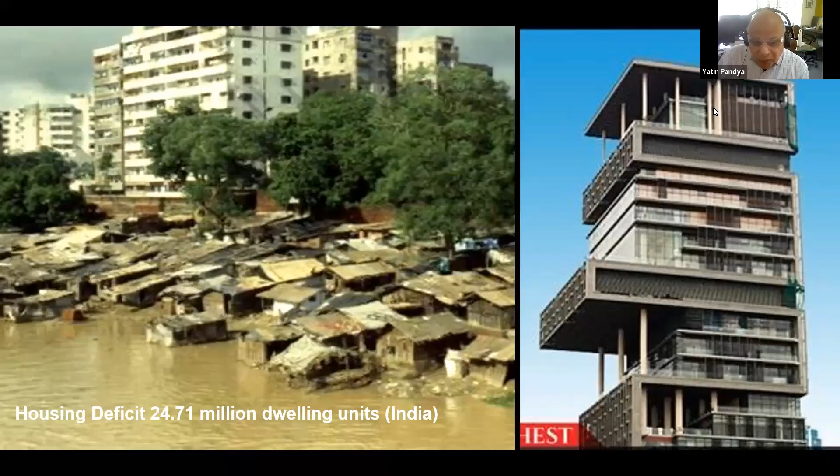So with all that, what are the kind of challenges and realities within which we need to consider the design? This is just an acknowledgement of the complexity and the number of challenges we have. But as a student, as a young mind, it is not to start with disappointment and frustration. On the contrary, it is with a challenge accepted to say, can there be a win-win solution?

Like Gandhi gave us once. Gandhi was not only about freedom from Britain. He said that you would also be a slave if you are not self-reliant; then the macho husband would also bully you, and a slumlord or a village lord would also exploit you. So with one or two idioms, something like the charkha, he ensured gender empowerment, rural empowerment, economic equity, and so on, and with sanitation and many things. So he went to the seed of things.

He tried to change the DNA of a system, so his contribution has been multifold, from safe sanitation to affordable education to economic empowerment to rural upliftment to social integration to gender equity. He was after sanitation because we call people untouchable. The root cause of untouchability is that those who clean after you are the ones you call untouchable, when actually you have to clean after yourselves. So if we find a system by which you don't need the scavengers, then that discrimination would not happen.

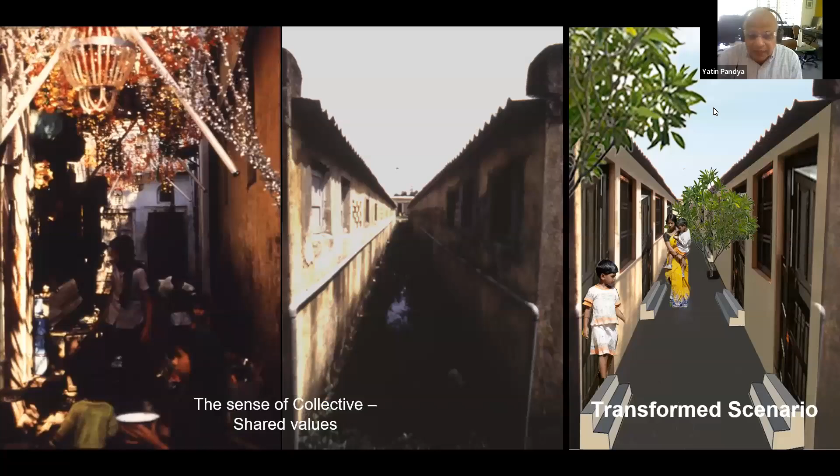So that's what we keep trying to keep. Don't worry about who we are today. Don't fool yourself. We have changed so much just because of the smartphone. But as humans, we are the same. And what are those dimensions at the human plane that we can try and include in our design equation, so that we can create a quality of environment where we could make a difference through design?

As against that, the picture in the middle is a newly planned settlement, and there is a gap left between the two back-to-back houses for services to run. So it is actually meant to be an improved solution, an environmental street, so to say. But as you see the design flaw, there is a kind of window at the back of that house, which is a passive interface, where arguably there would be a kitchen, and everybody throws their muck out of that window into that back alley, which is just a dead space.

And as a result, what should have been the element to improve the quality of environment has actually become responsible for degenerating that environment. Now, if you simply, in terms of design awareness, change that window into a door, arguably you would have an image like on the extreme right, where it would be positive space. Nobody would make complaints about what's happening at the back, because both neighbors at the back and side would have mutually divided the space as their own, and they would maintain it without asking or waiting for a municipal employee to come and do that.

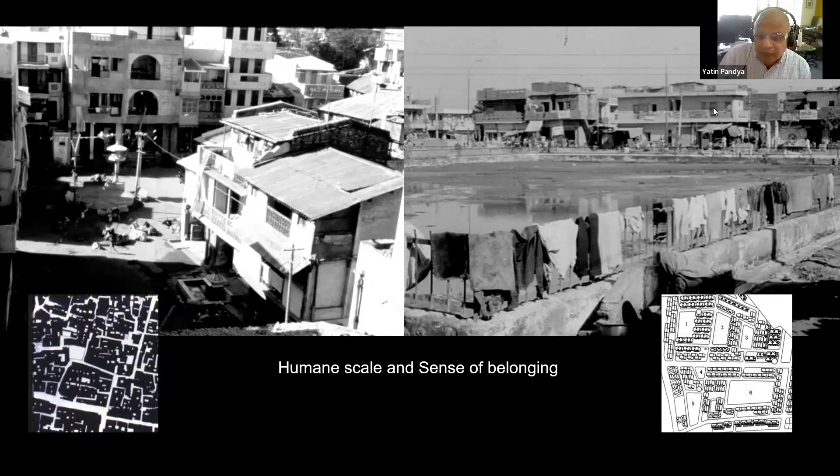So these are the kinds of things where, as a designer, if we are aware about the context, aware about the kind of grain of the culture and so on and so forth, we might do better. Like here, these are apparently contrasting slides, but they tell very aptly that these decisions are not about economic availability or status. It's more in the mindset rather than economics.

For example, on the right, one of the most expensive real estate in the world is the Ballard Estate in Mumbai. And what you see below are the most beautiful colonial structures, occupied by one of the wealthiest corporate houses of the country, now of the world. So if you see them from the street side, they're very beautiful picture postcard images.

But if you just go to the inner side, the rear side, so to say, you can see the context, that there has been a pipeline over a window, which means that you have nothing to do with that side. And that attitude has relegated, in Mumbai, where every square inch is forbiddingly expensive, these kinds of spaces to be abandoned, unused, encroached, and therefore a dump yard. And if I may add, a junkies' place post business hours.

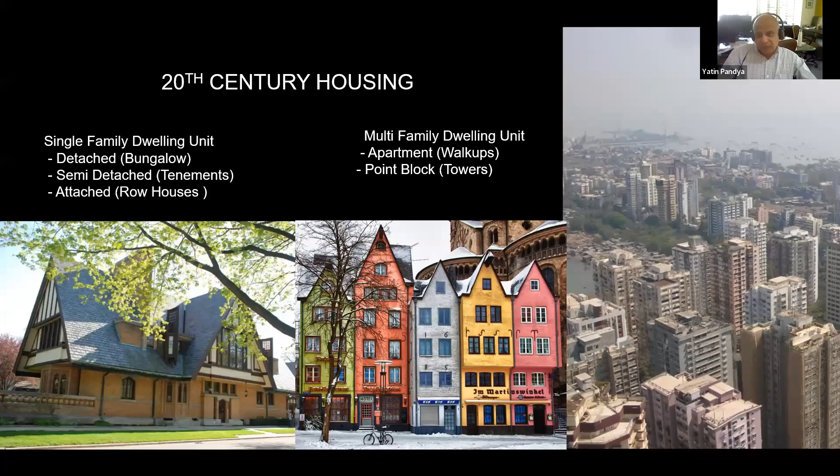Then there is something called mid-rise, something like 6 to 8 stories, a mid-rise development, and 8, 10-story and onward is a high-rise in Indian definition. So it might still change; overseas you have 100-story and whatnot, which so far we are not. We are probably talking till 40 stories right now, which are point block towers. So those are the kind of typologies we have.

What are the inherent qualities and limitations? So when we talk of bungalow, it is conducive to transition from suburban to urban. There's flexibility of orientation. There's a growth potential. It supports the family unit in terms of play area for children. Elderly can come out and flex their muscles and be free, and it's a low density.

As I say, it came from that Bangla, and therefore it was in response to hot, humid climate with transparency to breeze, multi-tiered roof so that air can flow through. It could shelter from sun and rain, therefore veranda, and it was extroverted. So the life happened because of the comfort condition in veranda. Now, when it is in veranda, then you need privacy. Therefore, there was a compound with a setback and a distance.

Try and build a bungalow without a setback. You will feel naked there. Okay. So these are the consequences, and these are the kind of types that there are. So we see that in Goa, we see that in many places. It's a colonial hangover like this. So the life was in veranda, and even a staggered louvered door, so that even the things inside.

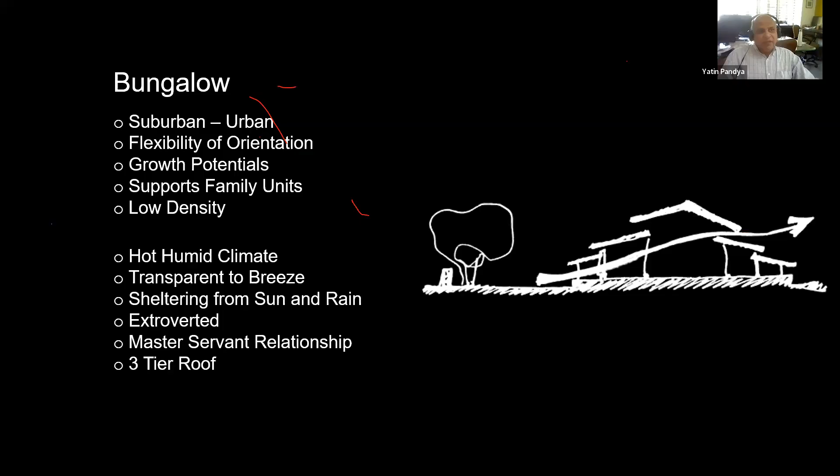Now, the comparison, the point to keep in mind is that central most space. Let me go back here. In the section, the most central space is closed, and it's a big hall for banquet and party, which means that the most inner space was the most public space. A total reversal of courtyard houses, where the courtyard was the most private space. And if you conquer the courtyard, you have invaded the whole house in terms of its privacy, in terms of its life, and so on and so forth.

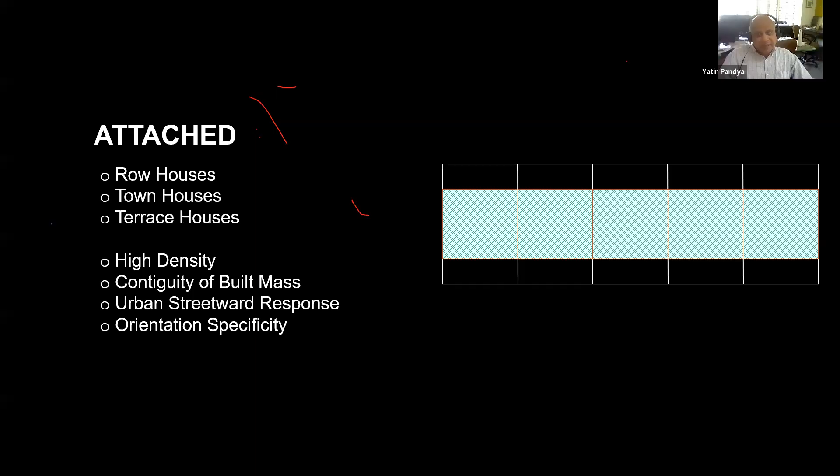Semi-detached house, where at least on one side you could connect. So it's the same as a bungalow, but you are able to squeeze it a little more for the land needs. Share it from two sides, and now certain characteristics change. It's still a single dwelling, but there is an orientation to the street. So this starts getting streetward. It's a little more high density, and at least to the walk-up, it can compete quite better.

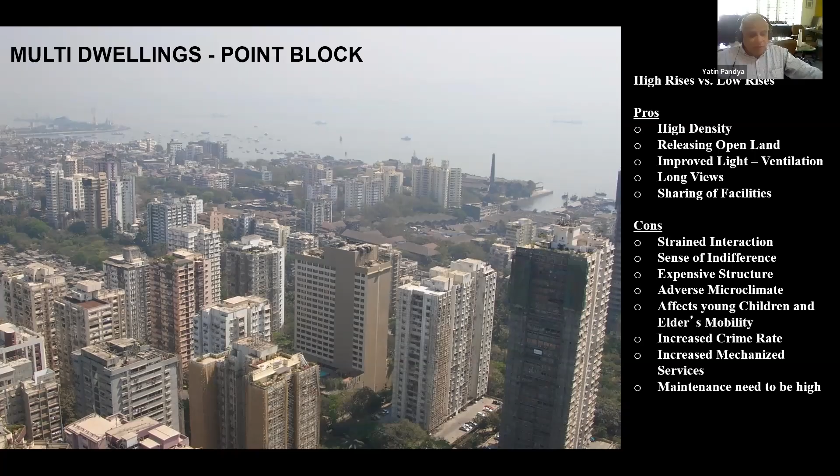But like in Mumbai, to have these slum people live in this, where most of their life is outdoors, their houses are small, so they want to live outdoors, their economic activities are outdoors, their relation with the street is what gives them economic sustainability. And their level of affordability to maintain a number of elevators, etc., is not there. So for them, is this the right typology? So you have to think for whom it is right.

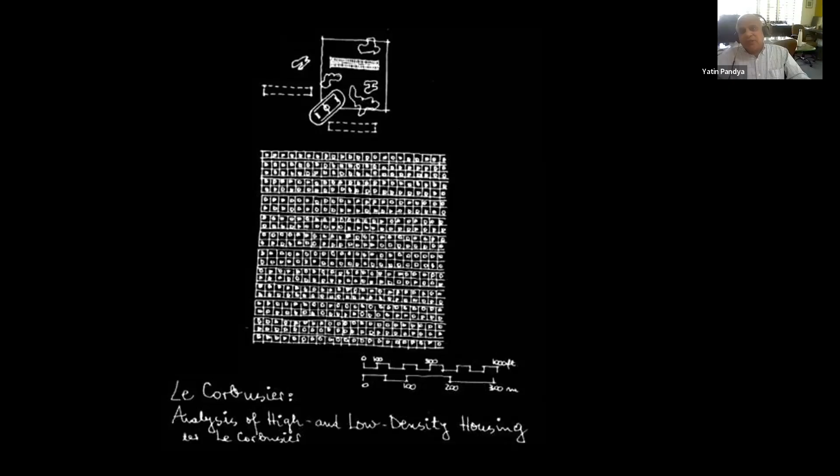So this was the kind of sprawl of a neighborhood, which Corbusier said can all be put together with the advent of concrete and later the elevator, after industrialization in the beginning of the 20th century. So he said that we can put it in one kind of a block, and that's how it came about. But look at what threshold it starts making sense, and till that threshold, there is another alternative which is far better. For example, this is only a simulation for FSI 1.

And let us understand, India does not mean Mumbai, Gurgaon, and certain parts of Chennai or Calcutta. How much of Calcutta even today is low rise? How much of Chennai is low rise? How much of Delhi? Even in Mumbai, go to the original parts of Bandra, Worli, Bhuleshwar, and all that, and it's still low to mid rise. So don't get too caught up by only the soaring skylines.

So this is why I'm saying that still in many places 1.2 FSI prevails. And so if you were to think that, okay, just look at this, both cubes, which means the volume is same, the quantity is same, the cost is same. But if you think of this as a truffle cake, in one I cut slices vertically, then everybody gets the crust and everybody gets the cream or the cherry.

Same cake. That is a row house. That is the traditional house of any part of the old city. The one on the right is an apartment, where it's the same cake, but I'm slicing horizontally. So somebody gets the crust, somebody the sponge, and somebody the cherry or cream on top. So it's how you cut it.

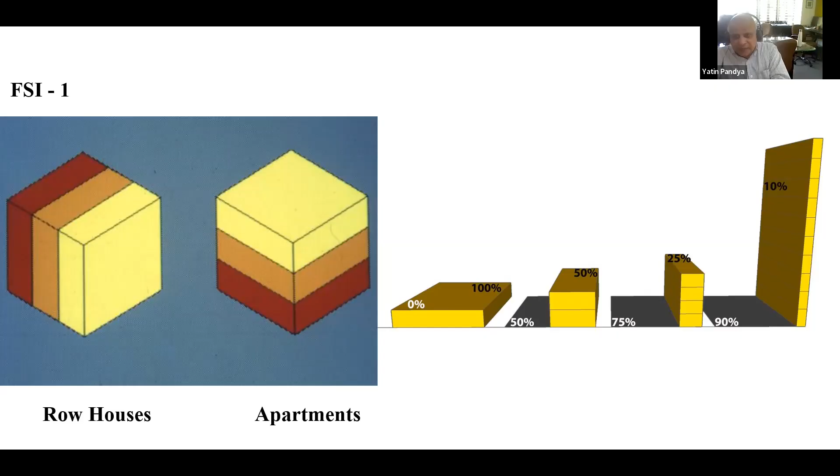Why only one FSI? Here is a simulation that says you can see 2.2, 2.5 even in a walk-up with everybody getting a terrace. Like ground floor, you can cover 60%, so you have 40% open space, 60, 40, 50, 40, 30, a standard progression, and you get 2.

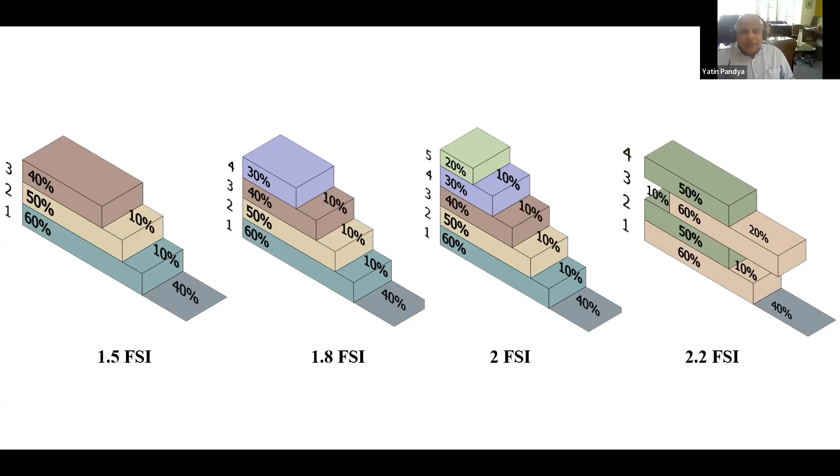But don't forget our upper floors tend to project out so that when the sun is overhead, you could cast the whole facade in shadow. So when you do all that, even 2.2, 2.4 FSI is very doable without any compromise on any aspect in a 4 to 5-story building. So this is just to remember that till this, it is your choice to go high rise, but not a compulsion.

Again, about the type vis-a-vis the default open space. In the left-hand side pair, suppose it was a 70 feet by 70 feet plot and you left a 10 feet margin. As you can see in this reticulation diagram, 7 by 7, so 70 by 70, 4,900 square feet, of which just a 10 feet margin leaves you with 50 by 50, which means 2,500. So from 49 squares you're reduced to 25 squares, which is just about half. So 50% of land has gone as open space, simply fizzled out into that 10-foot margin.

Okay, so that is the kind of issue. And although 50% of your ground coverage has been consumed, that 10-foot margin is not good for parking a car, not good to plant a big tree. Kids can't play there. You can't have a collective gathering. Just reverse it, like this perimeter block.

You have the same density, same FSI, same built-up, and same amount of open space, but now 50 by 50 is a kind of cluster courtyard. You get 50 feet by 50 feet, which means you can at least have 4 to 6 trees. You can have about 200 people gathering there. Children can play there, and you can have something like 12 cars parked there. Okay, so that is the kind of difference we can create just by reversing this footprint.

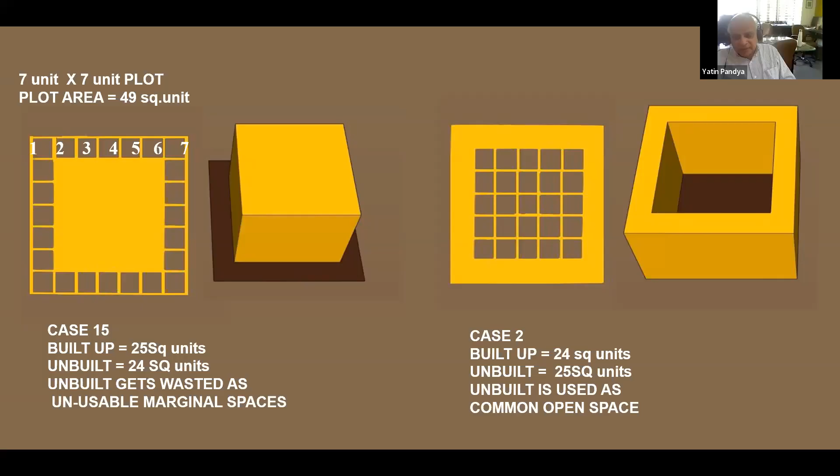So we have to understand not only the quality, but also the way we lose out quantitatively by choosing a different type. And this is a simulation for about 1.6, 1.8 FSI. You have to just trust that both are the same. But typically, what we see in urban areas is what is there on the right, and we think there's no choice other than that. And we are happy seeing these isolated needles as an urban form, whereas the same is doable on the left-hand side, where you can see it creates intermediate open spaces.

There's a sense of neighborhood. There are terraces, and there is a street formation, where on the ground floor you would have shops, on the upper floor you might have some offices, and then the top floor could be an institute, and likewise in Jaipur. So it's one of the nicest streets. So this is what we need to be aware of.

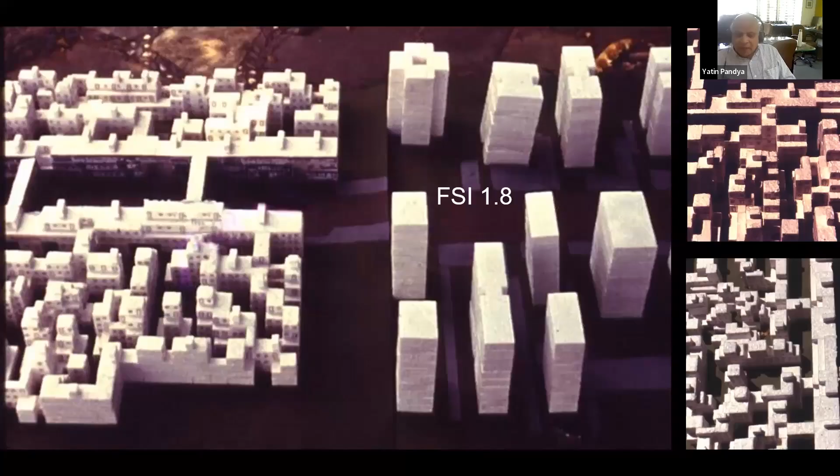And now, if you choose to go high rise or beyond the threshold, if you have to go high rise, then what are the design obligations of that? Okay. For example, this is by architect Yashvant Mistry, who just passed away, from Vadodara. This was his design in Ahmedabad called Naimesh Park, and it literally wants to say bungalow in the sky.

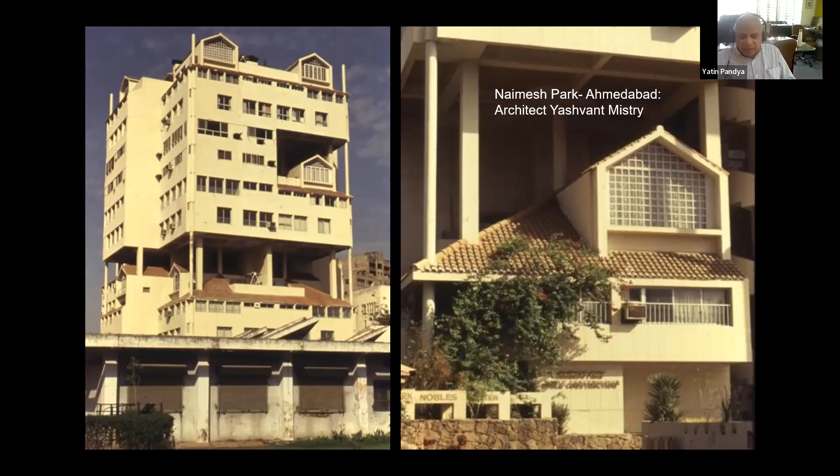Now, its aesthetic may be arguable, you might say it's faking, but at least the notion, at least the direction, at least the kind of idea holds that this tries to give outdoor space, this tries to give identity, this tries to give a different kind of image, etc. Well, that may be arguable.

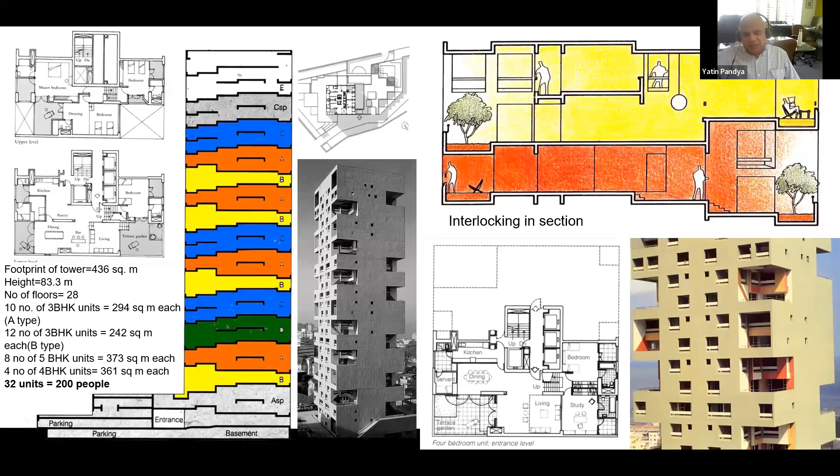And in Mumbai, it's dense, but once you go higher up, there's the advantage of creating private open spaces. And as the plans show, it was not just one open space. It got every bedroom an open space, and sometimes even the services, for which culturally we do need an open space. So that is the example. And here are the model studies.

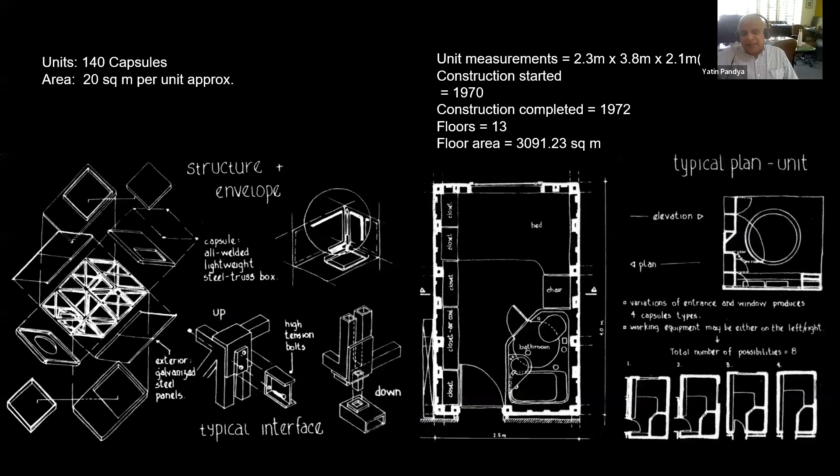This is Nakagin Tower in Tokyo, and in the urban area, the downtown space is very, very tight, and therefore it came up with prefabricated panels, and it's called a capsule house, where all you need is there. It's just about this, and yet there are variations. It's all anchored through a high tension bolt here. You need a fridge and television and now a computer, and you get all that, but that's just about the kind of space that it has.

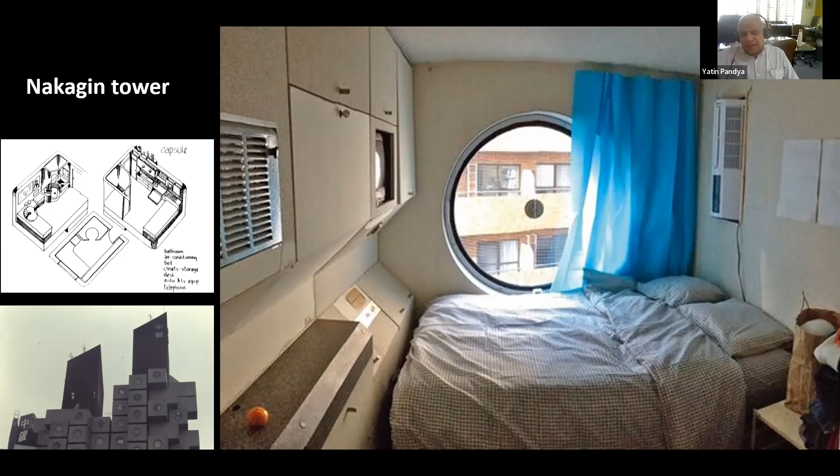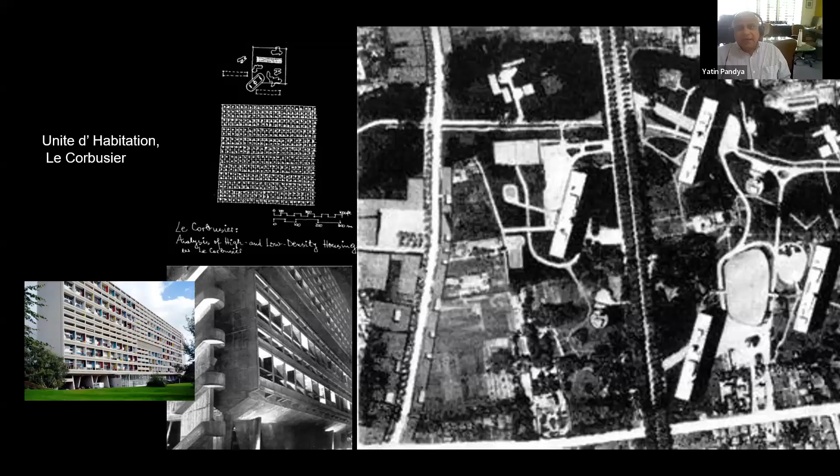So that was the kind of comparison you can see on the left top, that the urban sprawl can be reduced to that much of a footprint. And even in that, the built is so much, so the rest can be garden, amenities, etc. And he created an intermediate floor circulation corridor, which would be good for 2 to 3 floors simultaneously. So you don't need a corridor at every floor, and the corridor became like a street to connect each other also.

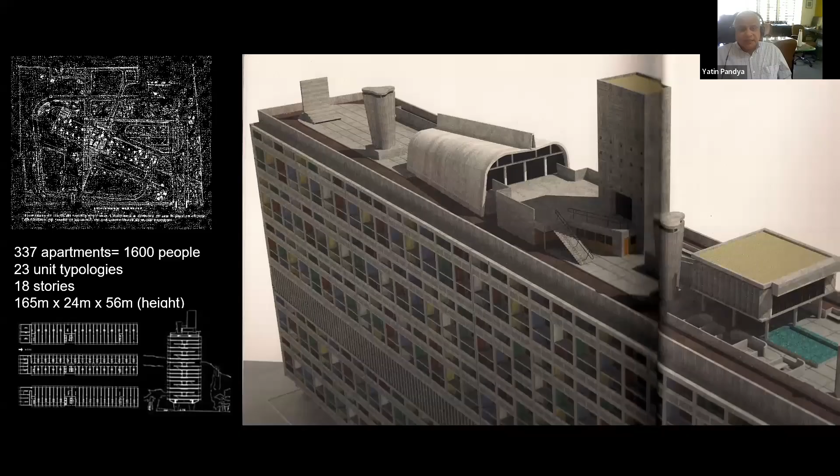And most important, the top floor became a common facility, including swimming pool, including kids area, which we often forget. Even in Bombay, where we crib about open space, we don't make terraces count for things, you know. So this is the way he thought a terrace should be. And this is the duplex.

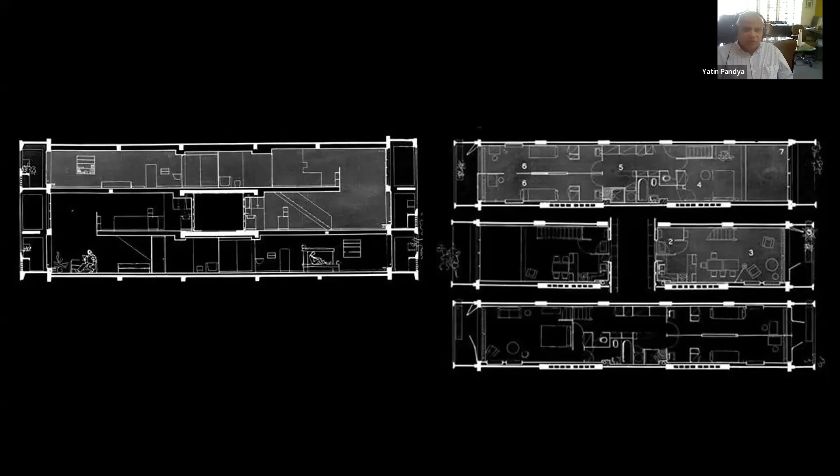So even though it's an apartment, you can see a central corridor, which can serve 2 apartments and 3 floors simultaneously. So in one apartment, you enter at the lower level of that apartment. And in the other apartment, you enter at the upper level, both being living spaces. So this is how, even in an apartment typology, he tried. So this became a neighborly street, so to say. For a climate, it might be shut from outside, but you can look out.

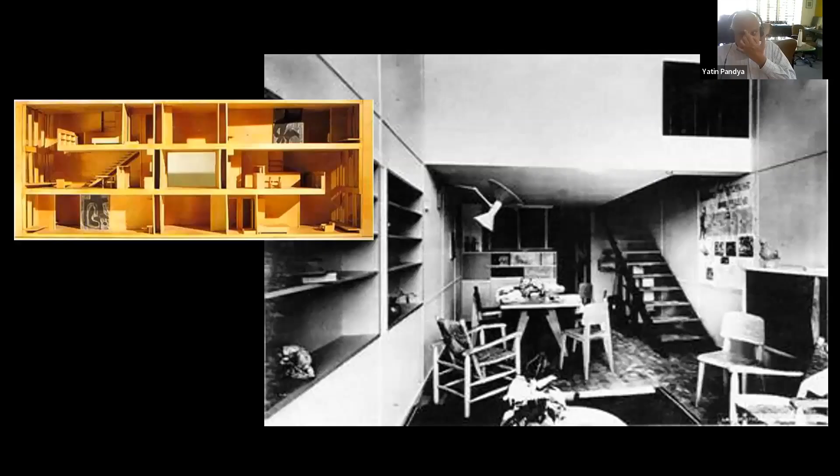And this way, each house was standardized in terms of its overall skeleton and the volume, but inside you could do it in different ways. So these are the different ways the layout could be augmented, you can see.

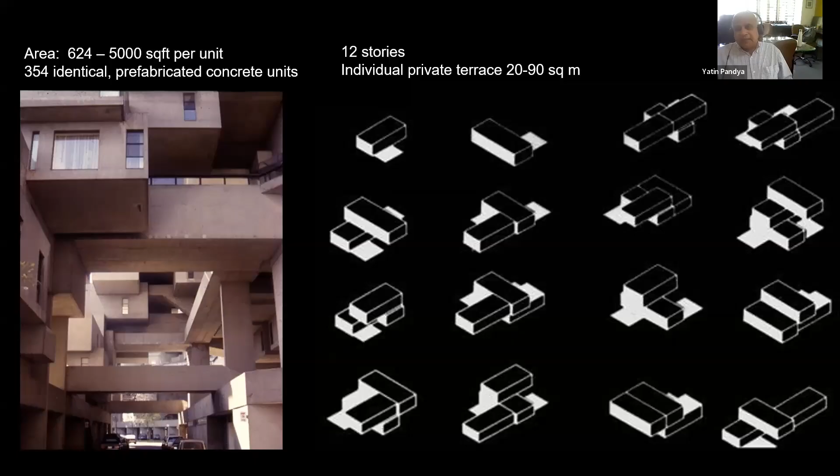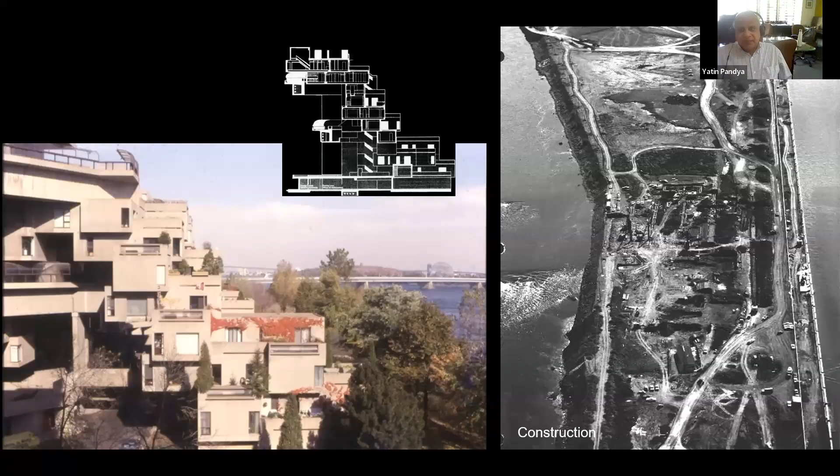And this is the way the layout came together. And this is how each prism could be made up of different panels. This was his vision and idea. These are the sky bridges. So the conduit you can see in a section, it's actually taking the pipe, but that becomes a cross bridge to connect from one end to the other, so that the neighborhood is not isolated at upper floors.

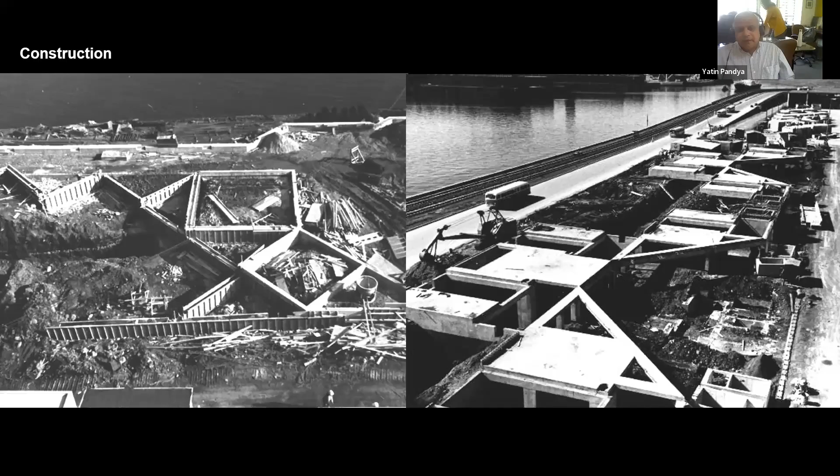This is the stage-wise construction. So you have the plinth, you have the units being brought in, and with self-balancing. The first unit would be off balance to support for a while, but now you put a counterweight of the next and it stabilizes. And you can see these are cross bridges. The units don't look like an isolated needle. So even as an urban form, it maintains the streetness of it with the contiguity of mass.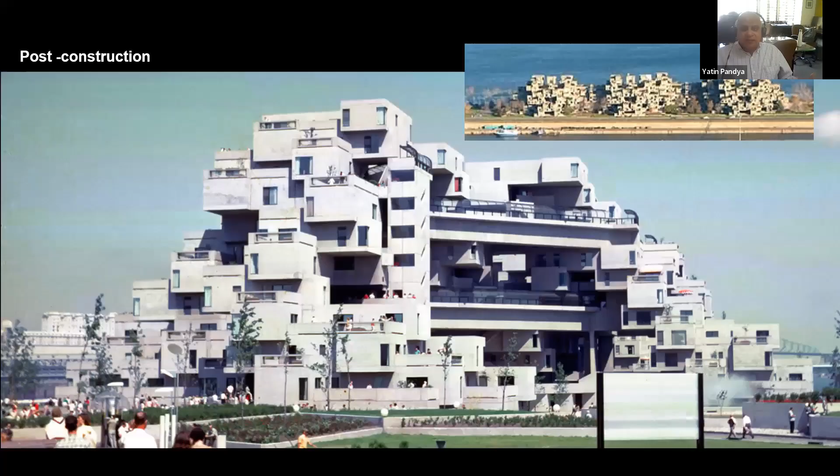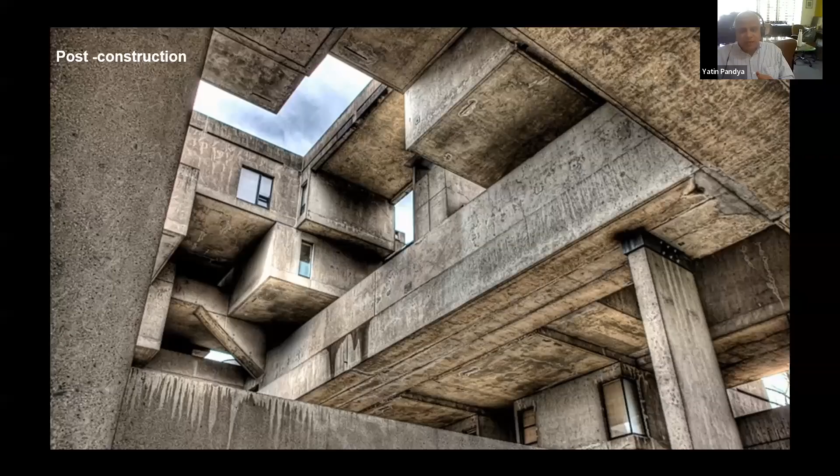There are people looking out at different levels, and you can even in the void like this look to each other, so for example, at the intermediate level, there is an open space, and if a child is playing there, you don't mind sending the child there, because you can look from there and it's safe from vehicles, etc. The ground floor is all the services, the laundry, etc. You can see in this window somebody standing there and trying to look out.

So these are the intermediate spaces. So the elderly can come out, children can come out, private spaces. You can see that even in 3 months of summer, they enjoy the landscape as well as personalization with outdoor activity overlooking the Lachine Rapids, the river in front. And you can see the cascading form overlooking terraces. So you have interactivity with visual continuity also with the neighbor and personalization.

And this is all precast. So the most severe conditions are a constraint, and yet you can do this. Ground floor is also where you can grow your stuff. So personalization even on the land. That's the way it maximizes the view to the river. Everybody, even from their own house, gets that view.

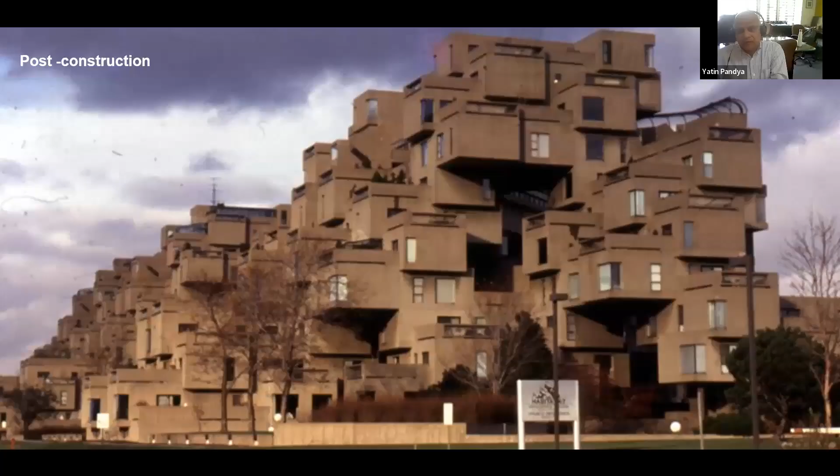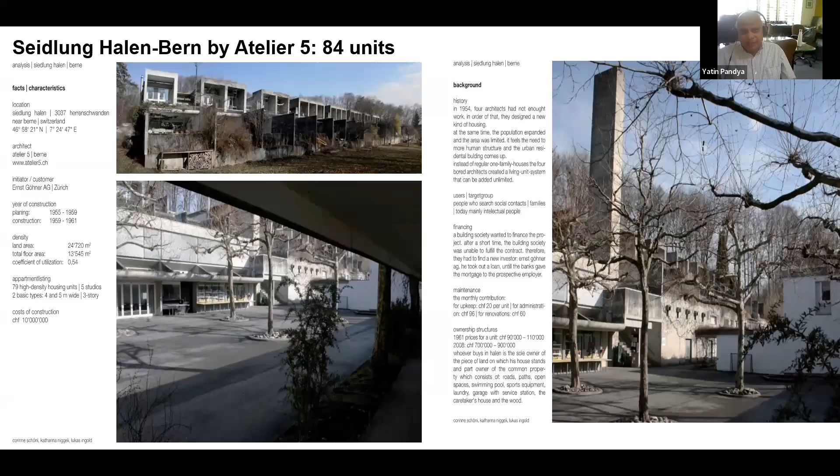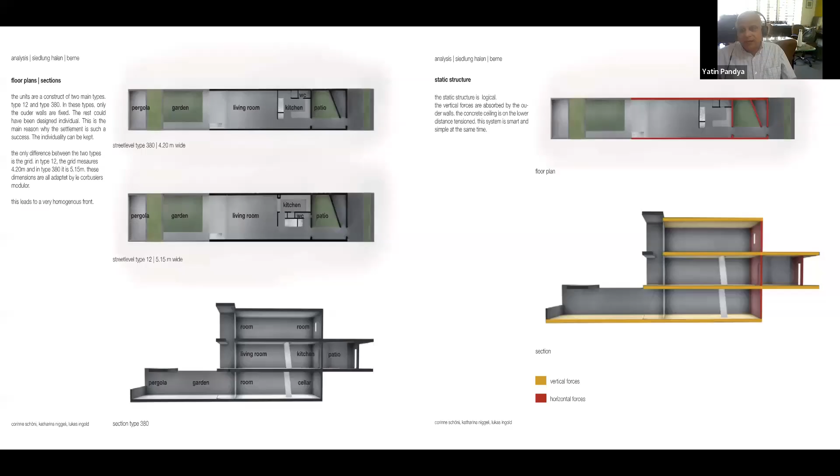And just to say that even the low-rise units, this is Atelier 5, which was in modernism heydays and learned from Corbusier kind of disciples. This is in Bern, outskirts of Bern, but a kind of very long, deep row houses in a cold climate, which deserves to be more for us in a warm climate. You can see the section, you can see there is a front garden. At the back, there is a courtyard. Also, the rearmost, you'll see the image like this.

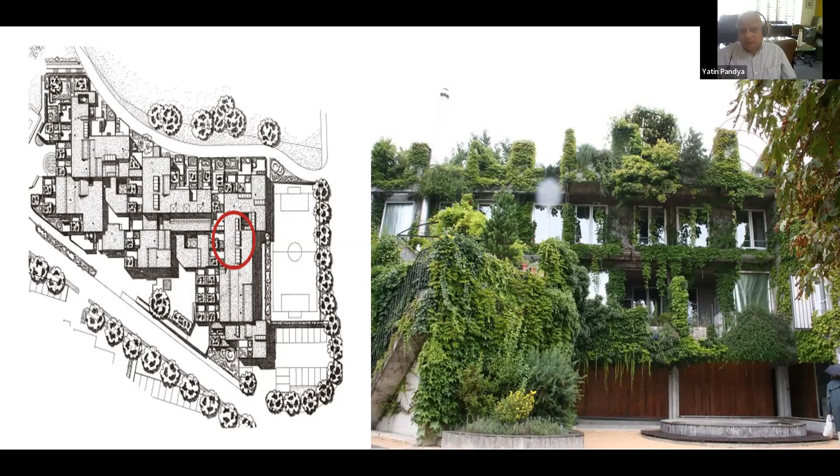I mean, culturally, the interactivity demands are low, and still you have this kind of housing, terrace housing with upper floor gardens, personal gardens and extensions. So in the 60s, people tried for this kind of living quarter with reasonable densities. You talk about green today, this is 70 years ago. Look at the intermediate spaces and the Byker Wall. This was at the edge of the highway.

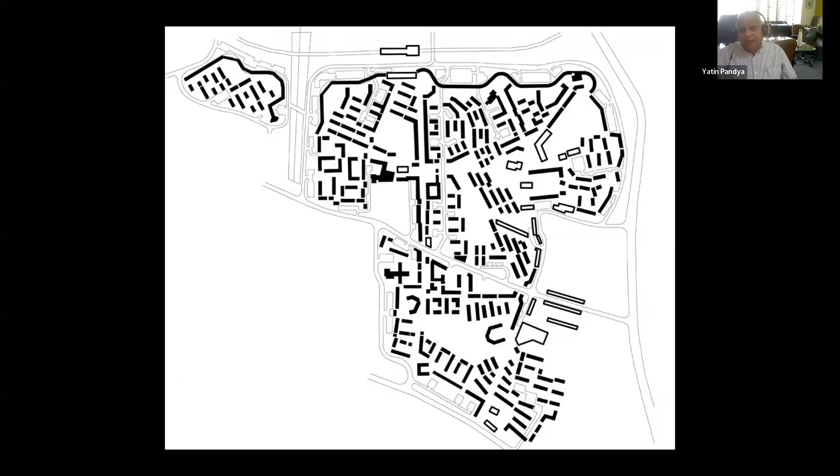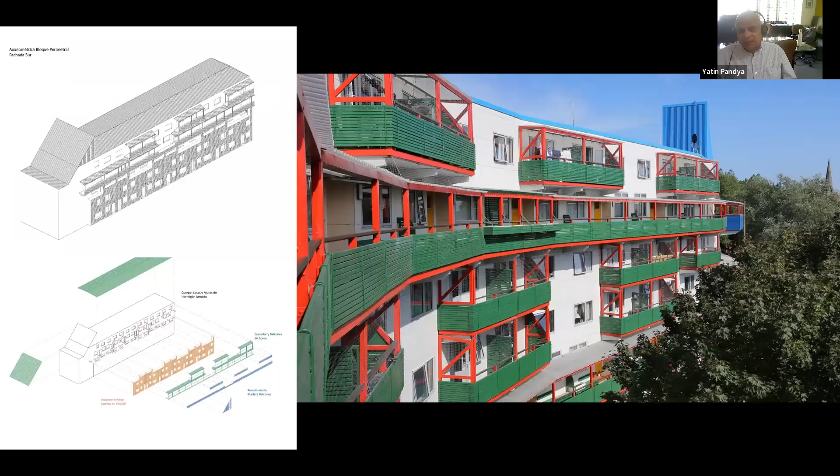And again, most of the densities, again, an example of a hybrid where different types are combined so that most of the thing is taken care of by this external one, which is vertical. So as a result, the rest could be low rise. And even in that vertical, the design fun was in the way the internal corridor and the balconies became a collective space like this. So you could have things to come out to, looking into the internal space, like this.

So externally, to cut out the noise of the expressway, it was a wall. So it's also known as the Byker Wall, but it does come up with the outdoor extensions. So the ground floor, you can see, is like a bungalow or like a row house. It has its own yards, while the upper floors come into this collective long terrace, as well as the individual terrace. So this might be a broader house like that.

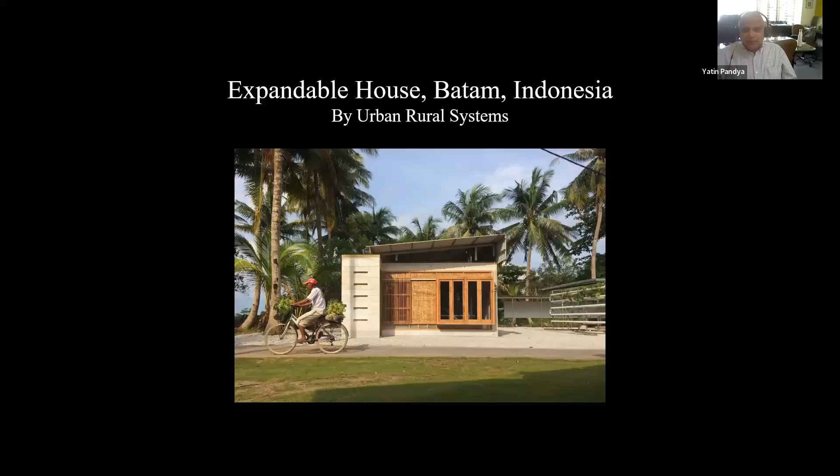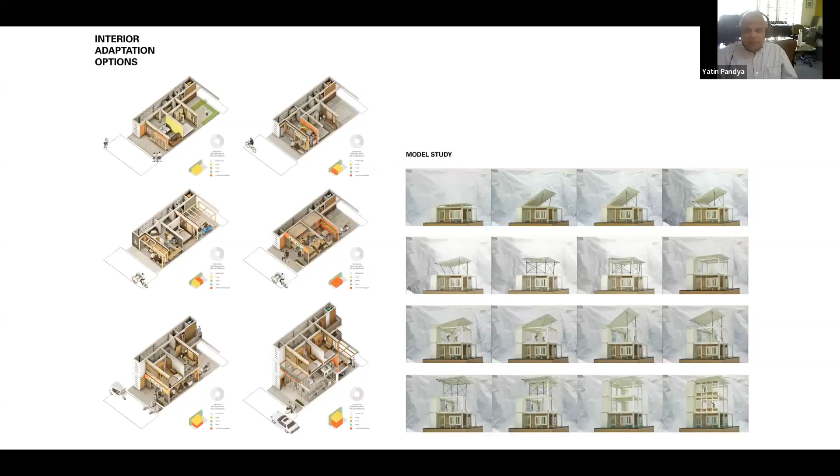This is an example of expandable homes and mixed use as well, that units, ground floor, one floor, what works where, and the same can add up to these different conditions. Front facade, ground floor shop, upper floor offices, you can expand this even further.

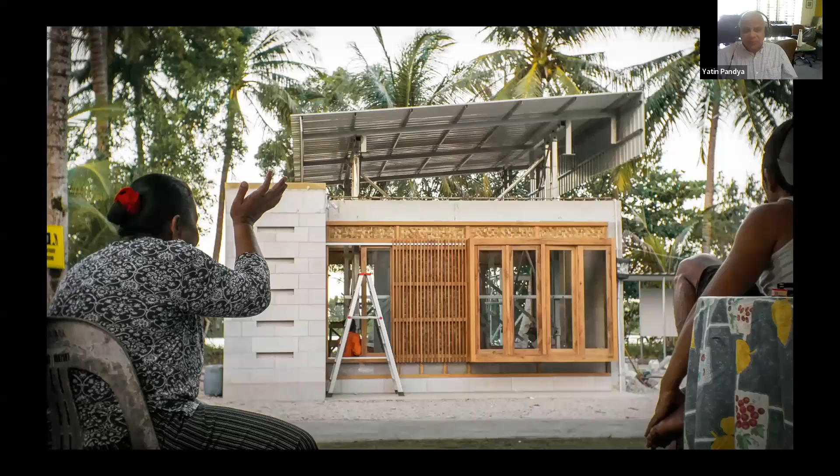So that's the first part of that presentation, talking about when is high-rise a compulsion versus, below what threshold, it may be your choice. Now, if you do choose to go high-rise, it comes with its own demands to make it humane. And for that, humanizing the vertical, what are the kind of design solutions or obligations, I would put it that way. And we saw some case studies positively trying to do that. So this is one part.